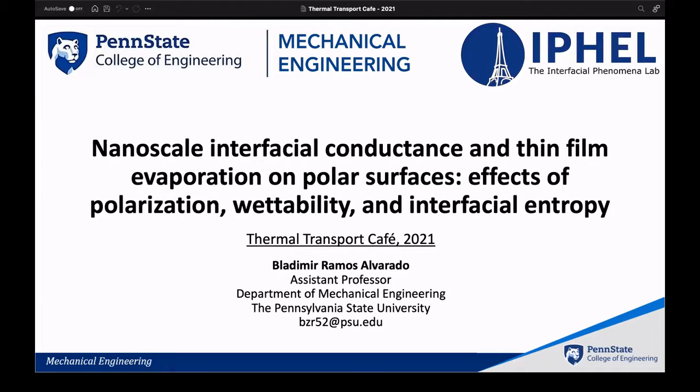So today, to fulfill the objectives of this Thermal Transport Café, I'm going to show you some of my findings, but also some of the challenges, the issues, aspects where I need feedback, aspects where I want to create discussion on nanoscale interfacial conductance and thin film evaporation. I'm going to discuss specifically the issues with interfacial modeling, polarization, wettability, and interfacial entropy.

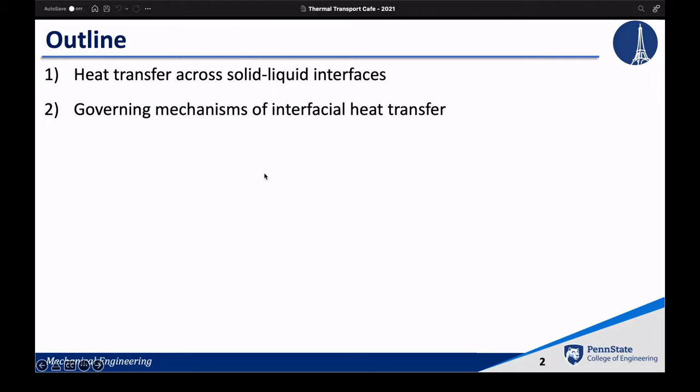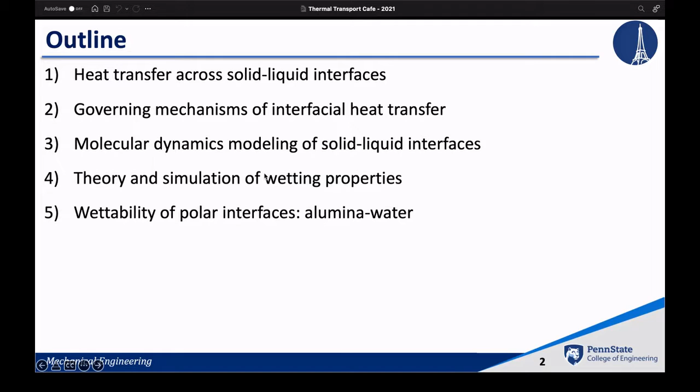A brief outline of my presentation: first, we're going to talk about my motivation to study heat transfer across solid liquid interfaces, the governing mechanisms of interfacial heat transfer as we understand them, molecular dynamics modeling of solid liquid interfaces, where I want to put emphasis on the challenges and opportunities to do research, theory and simulation of wetting properties as a metric to model interfacial affinity. Then I'm going to talk about a case study, alumina-water interfaces, interfacial thermal transport and wettability, interfacial heat transfer, and alumina-water interfaces. Lastly, some questions for open discussion.

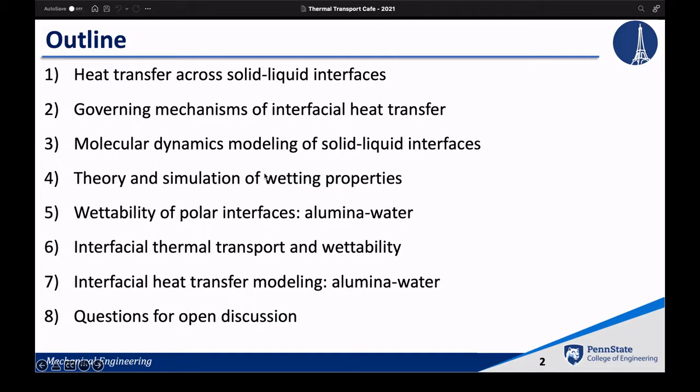As you can see, there are no conclusions, but I would like to open this communication in two ways. My main motivation to study heat transfer across solid liquid interfaces is photothermal therapy with noble metal nanoparticles.

Let me activate my laser pointer. Photothermal ablation and drug delivery systems are both enabled by near infrared light radiation on plasmonic particles, which create a change in the temperature of the particle. Those temperature-induced changes create breakage of the chemical links that carry the drugs, or thermal ablation. Those two objectives are enabled through solid liquid heat transfer.

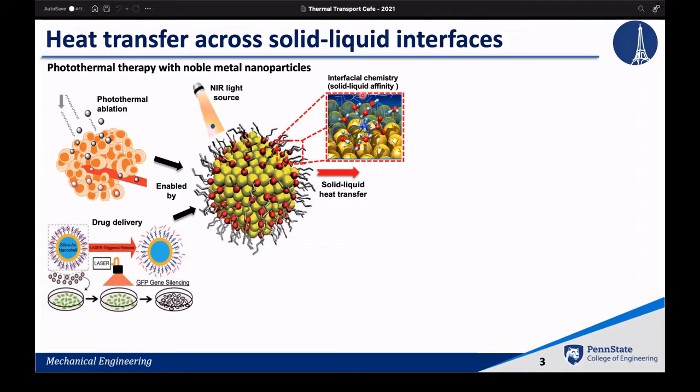The main modulation of temperature here is the amount of heat that goes from the solid into the liquid, driven by the main mechanism that I am targeting: interfacial chemistry, the complex interplay between temperature, linkage, the breakage of the links, heat transfer, and chemistry. Those are the three elements that we want to account for.

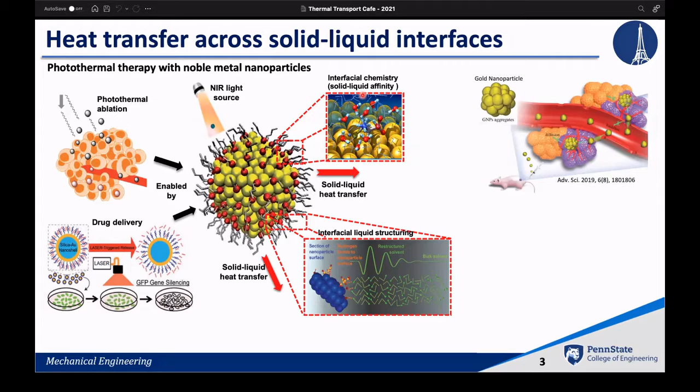As my theoretical findings have shown, interfacial liquid structuring is super important for solid liquid heat transfer. Again, this is for applications in the treatment of cancer, but it can also be applied to imaging.

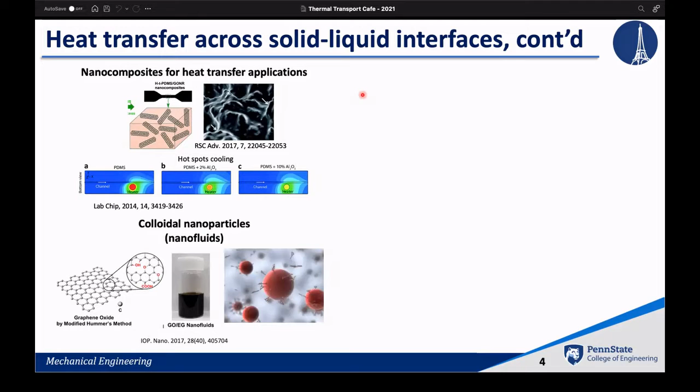Another application I'm interested in with regards to solid liquid interfaces is nanocomposites for heat transfer applications, colloidal nanoparticles as in nanofluids, and particularly for this presentation, filtration and desalination in porous alumina membranes, where the alumina-water interface is fundamental. Lastly, desalination applications and filtration using nanoscale systems.

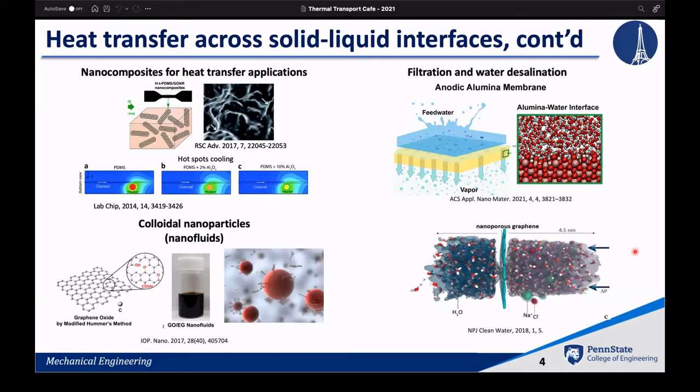To begin this discussion, I would like to briefly go over the governing mechanisms of interfacial heat transfer as we understand them.

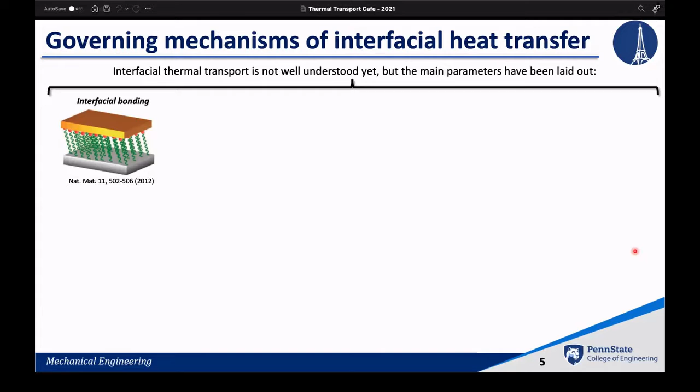Over many years we have studied this, we have a good knowledge of the main parameters that govern interfacial heat transfer: interfacial bonding, the strength of the bond between atoms across the interface, which determines the effectiveness of heat transfer, but also the modal mismatch seen on both sides of the interface. The better the match between modes, the better the energy transfer.

Roughness, even at the nanoscale, even in my simulations at the atomic scale, plays a big role in the amount of energy being transferred across interfaces, and particularly for solid liquid interfaces, liquid structuring at the interface.

What does that mean? The bias that the solid imposes on the liquid at the interface. You don't have that issue with solid-solid interfaces because solid atoms are not that mobile. But when it comes to solid-liquid interfaces, with the molecules of the liquid being the energy carriers, that becomes a big issue for heat transfer, one of the governing parameters here.

Some recent findings have shown that the interplay between these four is quite complex. For example, let me show you this example where we can see the interfacial conductance of a solid-liquid interface increasing as a function of the contact angle.

So the contact angle is increasing, meaning the solid becomes more hydrophobic. In theory, that says the solid-liquid interface doesn't have a strong affinity, but the thermal boundary conductance increases regardless. Here we see a graph, a set of data points showing that the contact angle actually increases for different systems, from bare gold to other chemically modified interfaces.

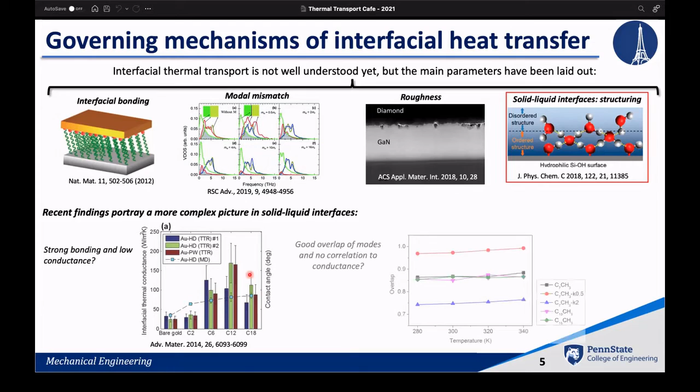So you're saying this is a good example. I'm saying this is a good example of modal overlap influencing heat transfer. But then, if we look at this other work, there was a nearly perfect overlap as a function of temperature for a similar kind of system, and there was no correlation whatsoever observed in the conductance.

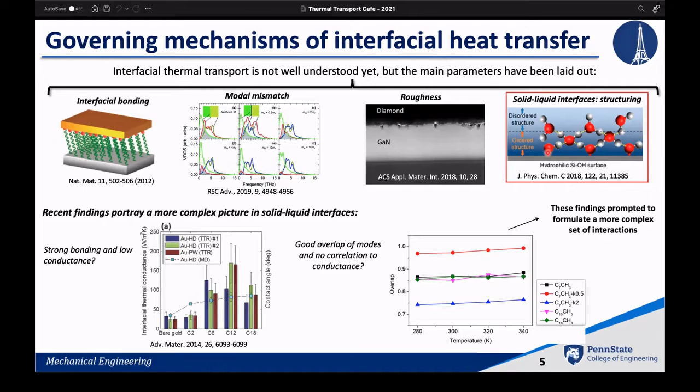What these authors eventually observed is that a complex set of interactions were needed to explain what was going on, and the parameter they used was the structuring at the solid-liquid interface. So in order to investigate this in a physically sound way, we need a modeling approach that can capture the physics, the chemistry, and the structuring of the interface.

But first, let me discuss some of the problems, limitations, and opportunities for doing this with molecular dynamics simulations. This is how we usually model solid-liquid interfaces: a very simple Lennard-Jones potential with two parameters, epsilon and sigma. These need to be determined, while R is the distance between atoms at the interface. This only accounts for van der Waals forces, and sometimes we include electrostatic forces.

How do we do that? By calibrating epsilon and sigma so that both are included in our model. But how do we actually do that? First option: this is a widespread empirical process called either Lorentz-Berthelot or mixing rules, in which the sigma parameter is determined by the arithmetic mean of these two parameters, and the epsilon parameter, the energy parameter of the interaction, is calculated by the geometric mean.

There's no physically sound basis for doing this, and the inappropriateness of this method has been demonstrated in a paper, I think from the 80s, showing clearly that this method is valid for monatomic non-reactive gases—and what we have in these solid-liquid interfaces is not even close to a monatomic non-reactive gas system.

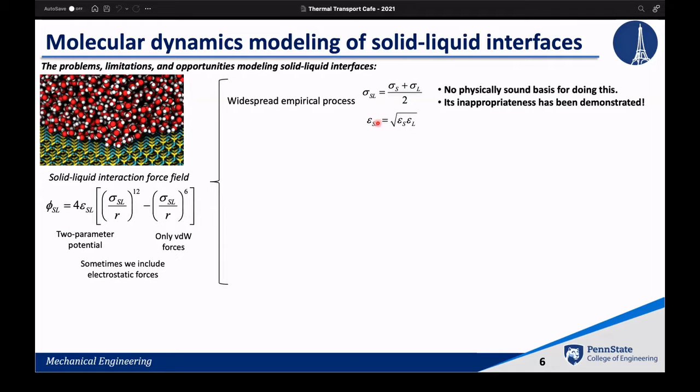You can go over the literature and find this method applied in many different papers. Sometimes we're eager to show that our model has some level of prediction of experiments, and we neglect the importance of properly modeling the interface.

Second method used in the literature: microscale matching of macroscopic wetting behavior. Here we go to the literature or conduct experiments, measure the contact angle on a surface, and try to match that in a size-independent molecular dynamics simulation. In theory, that's impossible to do, since molecular dynamics simulations are size-dependent. What we do instead is an extrapolation to the thermodynamic limit, where we can retrieve that macroscopic calculation.

This process is more physically sound than the first one. However, the issue is that we need to calibrate one parameter while keeping the other constant. And still, sometimes they rely on a calculation that gives the equilibrium distance between the solid atoms and the liquid molecules—and oftentimes that calculation is not very physically sound.

When you try to compare that to AFM calculations or DFT electronic structure method calculations, you see that the equilibrium distance between the solid and the liquid is not really what is predicted from this equation. Again, it's not physically sound.

And even if that's possible, we would have an infinite number of possibilities for obtaining that desired contact angle. If we have two parameters and we keep one constant, we need to close the problem with another variable. And lastly, we have curve fitting of DFT-derived adsorption energy curves.

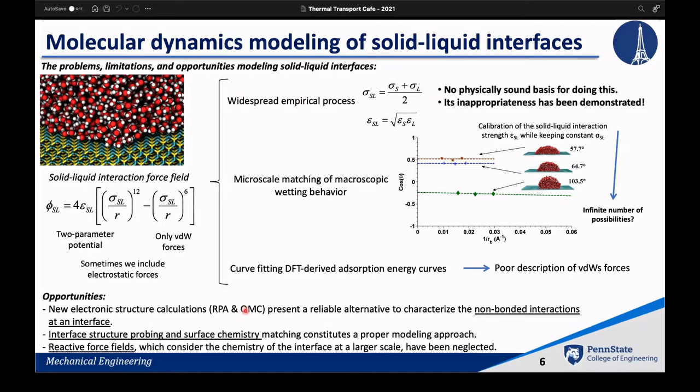And lastly, reactive force fields such as ReaxFF and some others have been neglected for studying heat transfer. So that's why I wanted to focus some time on this slide, so we can go back to the discussion on how to improve our modeling.

These slides are going to talk about some of the calculations that I do in my group to model heat transfer and interfacial affinity. First, we calculate interfacial affinity.

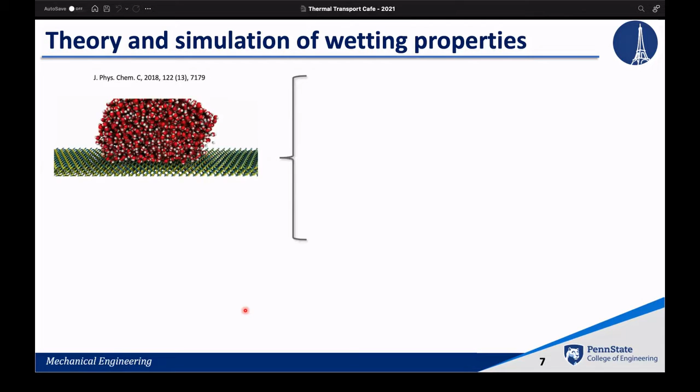We characterize interfacial affinity through wettability simulations at the nanoscale, which, as I explained, can be expanded to the thermodynamic limit by performing extrapolation. We essentially allow a group of water molecules to equilibrate on a solid, given a set of interactions that I'll later discuss how we extensively work to characterize. The result could be either hydrophobic or hydrophilic conditions, and these depend on the quality of the interface model.

We calculate the work of adhesion for every interface as the change of the free energy of the system, given by the energy change in the interaction energy between solid and liquid molecules, and the entropy change. This is not the thermodynamic property, but a characterization of the change in the state of order from the bulk, where it's highly disordered, to the interface where we have the bias imposed by the solid.

And that's also equal, as we know from thermodynamics, to the surface tension times one plus the cosine of the contact angle. We have created a model, so this calculation is kind of easy for part of them. The contact angle can be obtained from my simulations, and the surface tension can also be obtained from the simulations. This energy calculation is a very straightforward summation of all the energy interacting in the system.

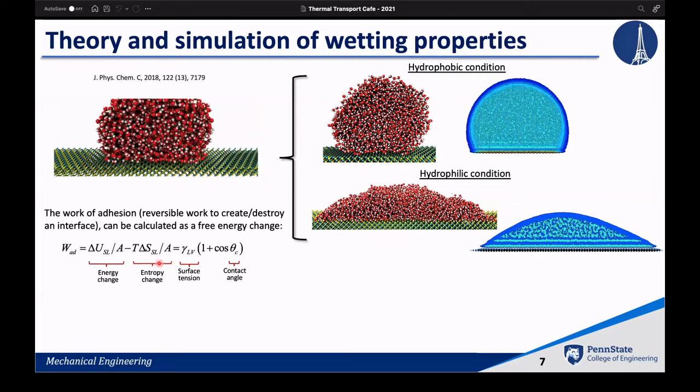But this one is tricky—very tricky—and no theoretical model has been fully successful at predicting it. We have come up with a kind of engineering approach to answering this question, in which we calculate the work of adhesion as a total energy of interaction calculation, using the energy of interaction between one single molecule and an infinitely large surface of solid atoms.

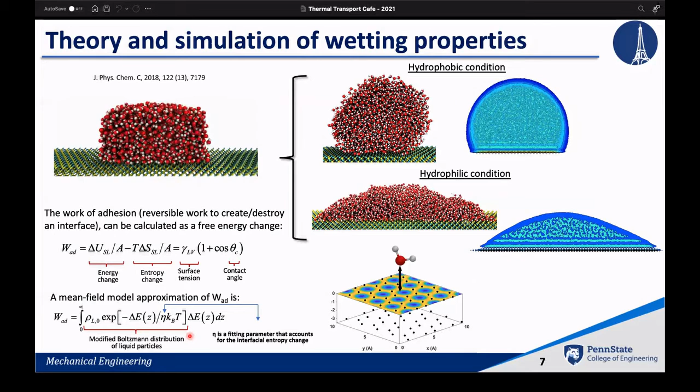And then we calculate that energy as given here: energy per unit atom. Then we integrate that energy per atom or per molecule over the distribution of liquid particles, which we model as a Boltzmann distribution. In the Boltzmann distribution, we include a tiny fitting parameter that eventually helps us account for interfacial entropy change. That fitting parameter, even though it seems like a fudge factor we're including there, the physics built into this model is strong enough that having one data point is enough to calibrate the full spectrum of wettability in our models.

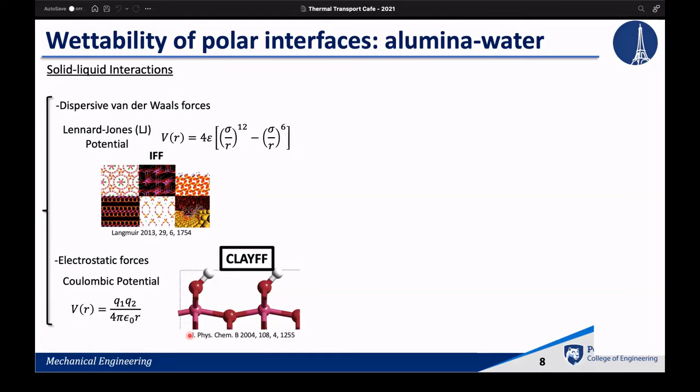Let me show you a case study of the application of these methods for alumina-water, in which we model the liquid-solid interfaces through van der Waals forces and also electrostatic forces in a separate manner. They were not put together into a single potential, but split into two. We started with the clay force field developed for ceramics interacting with water, but we encountered some interesting issues.

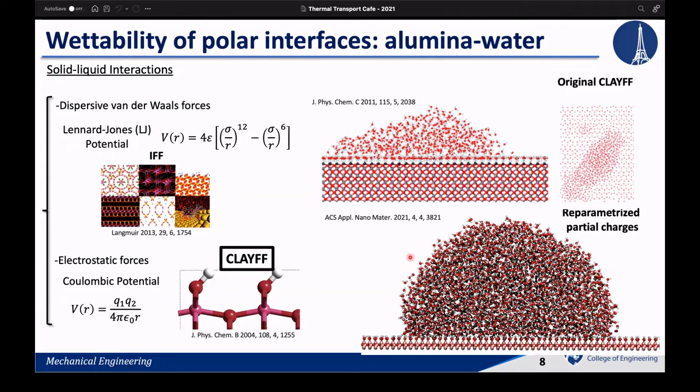In this 2011 paper, they tried to model wettability with this force field. However, look at the shape of this droplet—even if it's tiny, there is no physically sound shape here, and looking from above it looks kind of weird. We had to reparameterize the partial charges in the system because we observed they were off the charts, completely out of the physical range, and now we obtained a physically sound droplet shape.

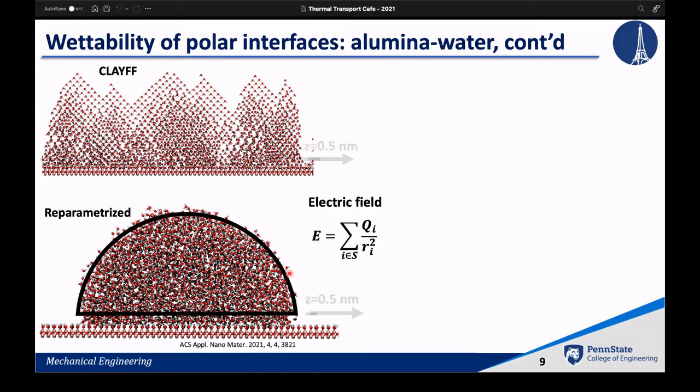Check this other illustration from our implementation of the clay force field as presented originally. The water molecules align with the surface, indicating a rather enhanced electrostatic force compared to our reparameterization. When we probed the electric field at this distance from the interface, we observed an over-exaggeration—the electric field at the interface was way over the charts. That's why the molecules were arranged in this shape; they were polarized, effectively polarized.

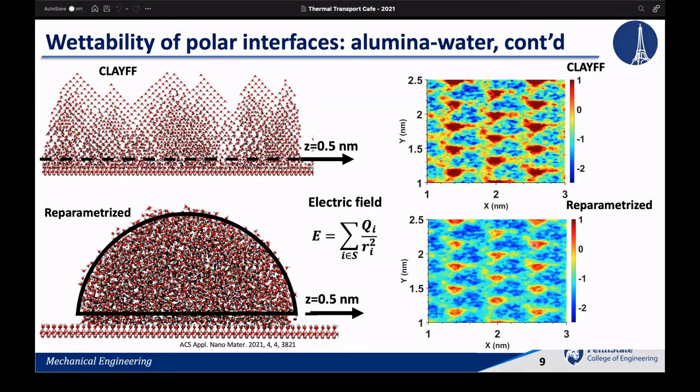We reparameterized the electrostatic force field using reactive force field simulations. In these simulations, not only are the van der Waals interactions recalculated at every time step, but also the electrostatic forces are recalculated and equilibrated.

So that's the aspect of interface interactions, but what about the chemistry? Usually when you model a solid-liquid interface in molecular dynamics simulations, you cleave a solid surface, creating interface atoms that are chemically active. Their oxidation state and valence state are not completed, so we need to passivate them, and we passivate this interface based on what we observed in the literature—with hydroxyls.

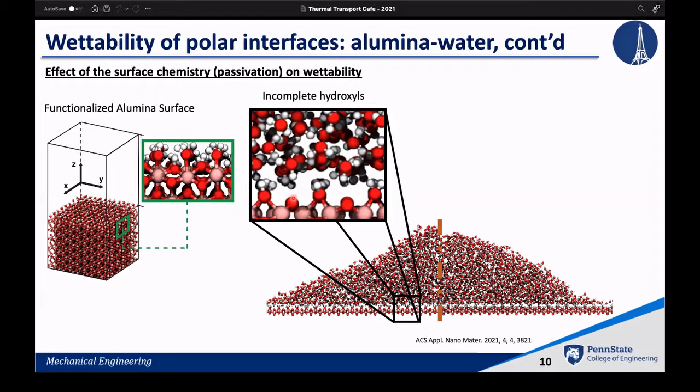We present two different cases: one where hydroxylation was not complete, and one where it was complete. The first case has some oxygen atoms that are not fully passivated, and even though we made efforts to create a more realistic interface, the geometry of the droplet is not that physically sound. When we fully passivated the interface, we follow the profile we were expecting to observe.

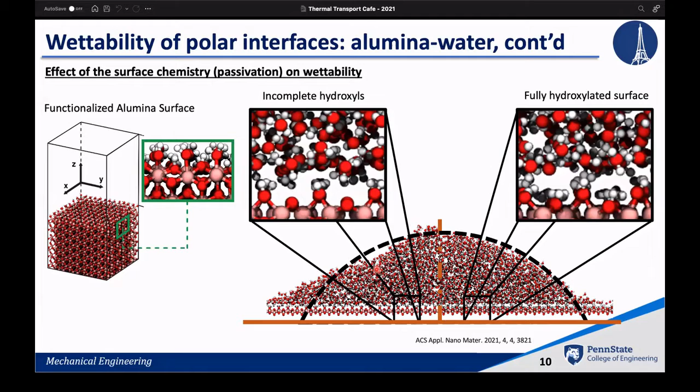This highlights the importance of how you model the solid-liquid interactions—van der Waals forces, electrostatic forces—but also the chemistry of the interface, how you properly passivate an interface exposed to a liquid. We did a lot of work just to get the interface model right. After this, now that we know our interface model is physically sound, we can study wettability.

We consider three different surfaces: the 0001 plane of alumina, the 1210 plane of alumina, and amorphous alumina. We don't know which plane will be in contact with water, so it's good to have this characterization for different planes. We observe an anisotropy of wettability, which has been reported before and is predicted and explained by our wettability model, and more recently by experiments.

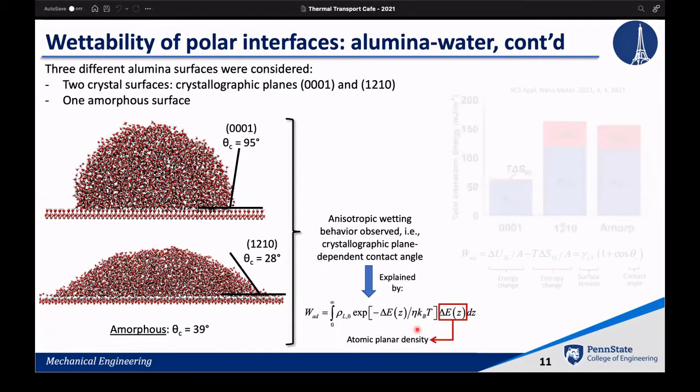Where is the effect of the atomic planar density? Right here in this energy per unit molecule. Now that we have this fully characterized interface and the wettability conditions characterized, we were able to solve for the entropy change of the interface as indicated in this equation. How? Well, we have the contact angle, we know the surface tension of the water model we are using—this calculation is quite straightforward—and then we can solve for the entropy change.

This is how we did it right here. As you can see, an interesting observation is that the hydrophobic surface had less interfacial entropy, and the hydrophilic one had a higher level of interfacial entropy.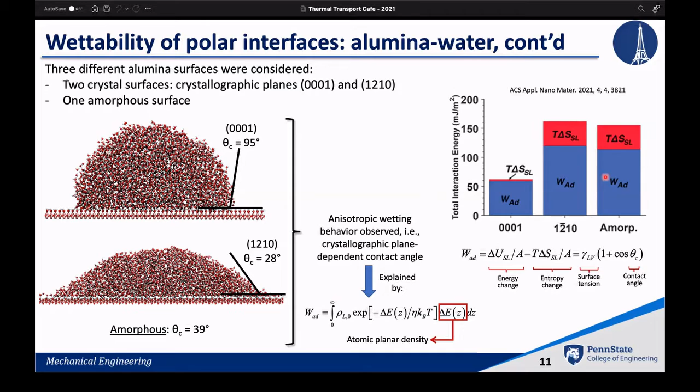All right, with that we finished our characterization of interfacial affinity and interfacial modeling, and we were able to move on to interfacial heat transfer.

Some traditional measurements of TDTR, of the thermal boundary conductance, have shown, in this older work from 2009 by Shenogina who published these experimental results, that there's some sort of relationship between the conductance across the interface and a parameter that is proportional to the work of adhesion.

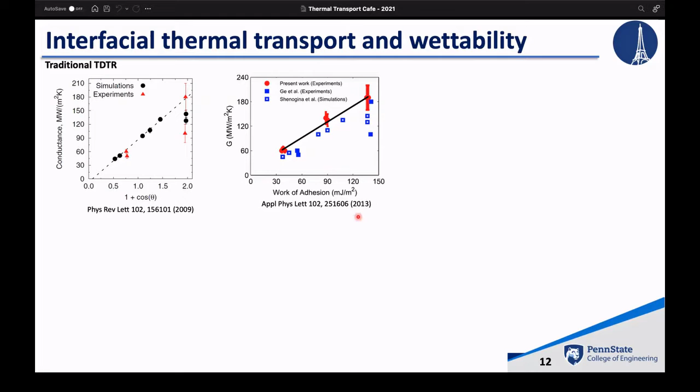More recent experiments have shown, for example with plasmonic nanomaterials, that that relationship is not that simple. In 2016, and more recently in 2019, Patrick Hopkins showed no relationship whatsoever with the transmission of energy across solid-liquid interfaces as a function of the work of adhesion. These data points are all over the place. No linear relationship was observed, and this also matches my modeling efforts, which I'm going to show you now.

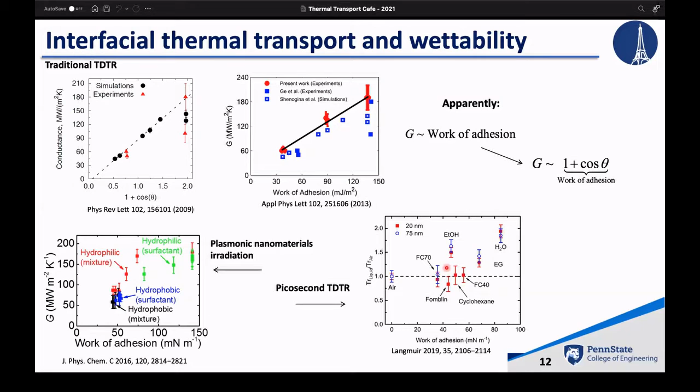This is how we model heat transfer across solid-liquid interfaces, a very traditional non-equilibrium model that resembles an experiment in which we create a temperature gradient across a system by injecting a given amount of heat on one end of the system, rejecting the same amount at the other extreme, waiting for steady state, and then calculating the temperature discontinuity at the interface so we can calculate the thermal boundary conductance given in this expression.

In addition to this simple calculation, we also perform a more granular calculation by going directly at the interactions between the solid and liquid atoms at the interface. This calculation also allows us to calculate the spectral makeup of heat transfer, the heat transfer distribution as a function of frequency of the modes going across the interface. From this granular, atomic-scale calculation we can also calculate the thermal boundary conductance as indicated here.

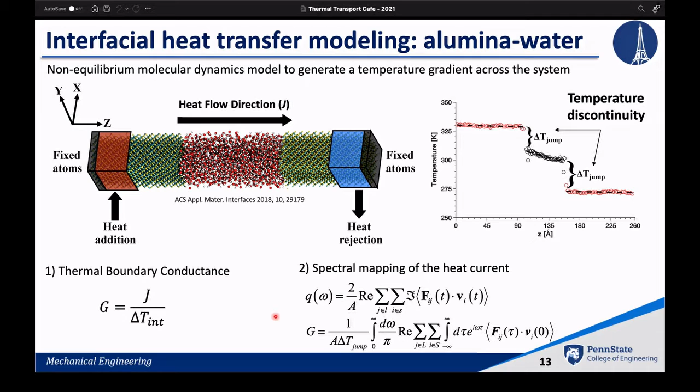The results that I'm going to show you next are a combination of both. Let's go see them.

Let's take a look at another metric, the total interaction energy. Maybe you're thinking the contact angle is not that physically sound because it's also a function of the granularity of the interface, or the work of adhesion suffers the same issues. Just look at the pure interaction energy, which is what we have here. Same trends. We would expect to see this point over here. That's not what we observed.

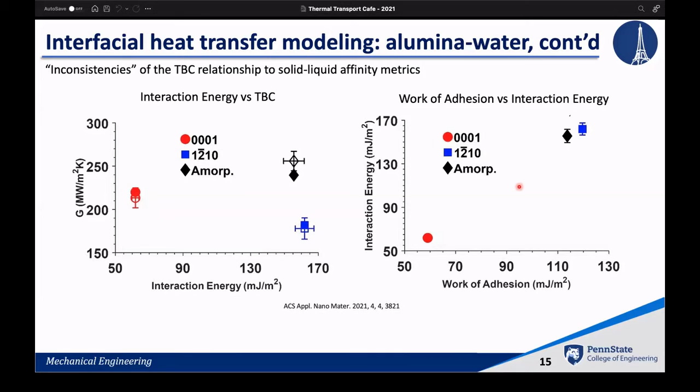We observed this before for silicon carbide interfaces, where if you plot transmission of energy, the thermal boundary conductance versus the contact angle, it doesn't really follow a universal trend or universal line, even if you change the metric from contact angle to work of adhesion. And it changes as you change the plane in contact with the liquid.

My dissertation work also showed the same, but I added an extra level of complexity and robustness by including two data points that account for the same wettability for a more complex system: a system coated with graphene that was theoretically, experimentally, and computationally demonstrated to have the same wettability. As you can see, it's a complete breakdown of those predictions.

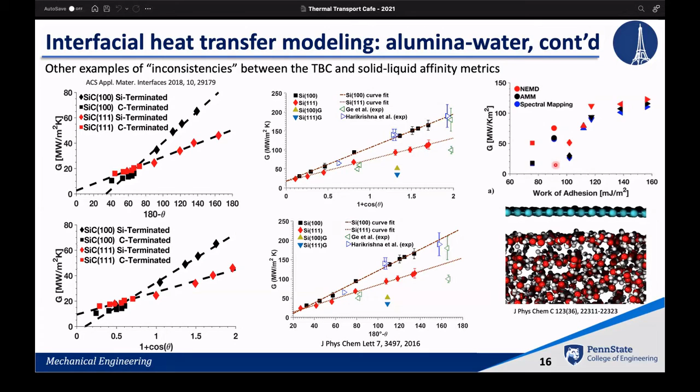More recently, we investigated different approaches to model a graphite-water interface, using many different interaction potentials derived from empirical methods, wettability, DFT, and advanced novel electronic structure calculations. Again, we see no relationship whatsoever in our calculations. But later on, I'm going to show you how we were able to reconcile this.

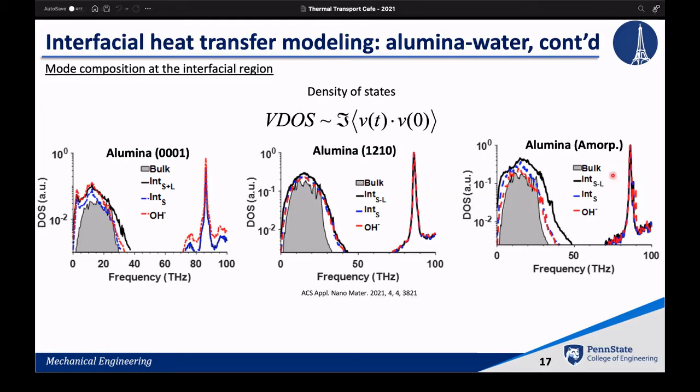It was interesting to observe the creation of this, but only at the interface, for all the surfaces. As I'm going to show you next, they really do not contribute a lot to heat transfer.

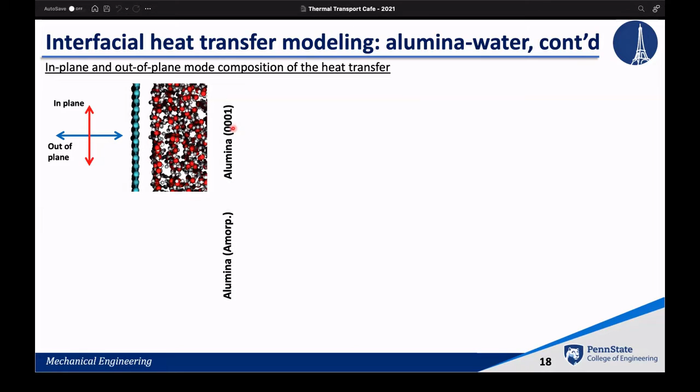Now we characterize the composition of interfacial heat transfer in out-of-plane and in-plane calculations. I'm going to show you two interesting cases: crystalline alumina and amorphous alumina.

The Coulombic interactions have this makeup. As you can see, most of the energy transfer in the crystalline system is out of plane—kind of a 70-30 relationship of the transmission. This little bump you see right here is the contribution from the optical modes created at the interface, and as we predicted, they don't really contribute much, but it was interesting to see that.

Same thing, you can see the little bump for the amorphous system, but this is quite interesting: if you look at the lines, now the in-plane modes are contributing the most to energy transfer—I'd say maybe a 60-40 relationship. It was completely inverted. For van der Waals forces, we observe the same behavior.

In the crystalline surface, out-of-plane contributions make up most of the energy transfer, and that relationship was inverted for the amorphous case, where in-plane modes contributed the most to interfacial heat transfer. How can we explain that?

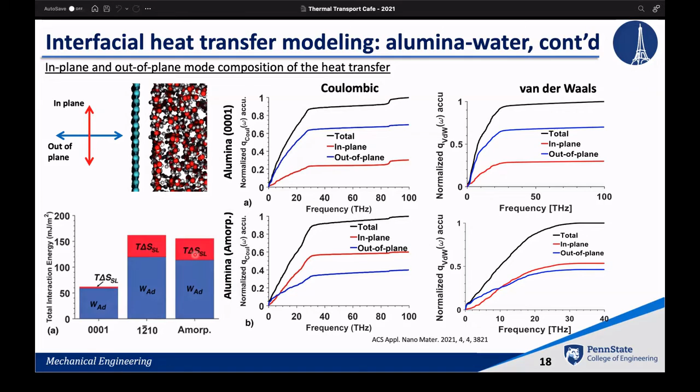From the interfacial entropy: the interfacial entropy change for the crystalline surface is super small, while for the amorphous system it's quite large. What does that mean in terms of the transmission of energy across the interface?

If you take a look at the distribution of liquid molecules at the interface for that crystalline hydrophobic plane, the change from bulk to interface, as indicated in this peak, is quite minimal. So the interfacial entropy change is not that significant.

For the amorphous interface, as you can see, it is kind of broken from the bulk. There's a lot of variation at the interface, a very large peak, and then secondary peaks close to the interface, because of the closeness of particles near the interface. So we have more availability of energy carriers—they get closer and interact in a stronger manner.

As you can see in the green particles in this video, they remain closer to the interface and are allowed to transfer energy in that direction, the in-plane direction. While the more hydrophobic, less granular interface mostly transfers energy in the out-of-plane direction. By the way, the coloring of this animation goes from red to blue, where blue represents more heat transfer and red represents less heat transfer.

As we were expecting, most of the energy transfer happens between 2 and 4 angstroms from the interface, and that's where we see the most drastic change in the distribution of water particles at the interface. Again, in these systems, the water molecules are the energy carriers.

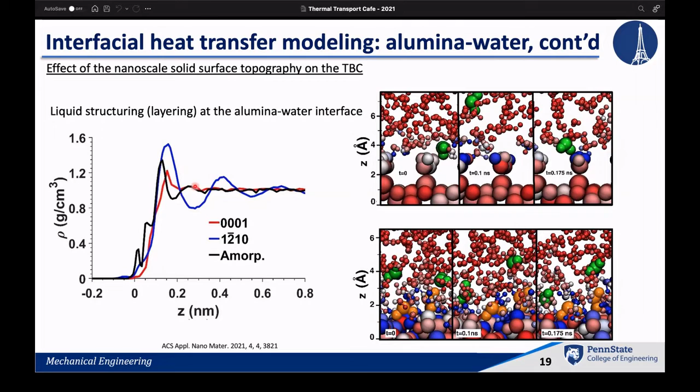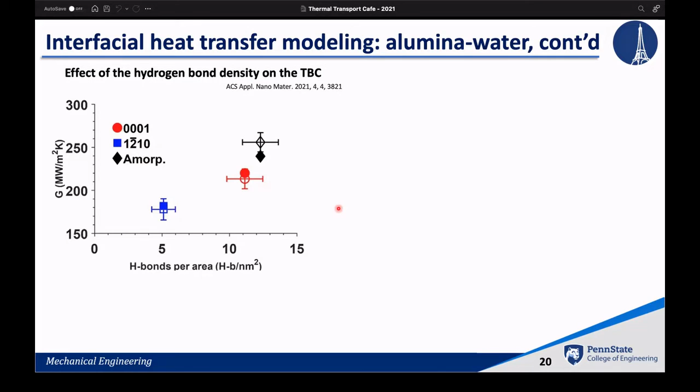Lastly, I'm going to finish this discussion on interfacial transfer using the metrics that were able to explain what was happening. For this highly polar interface, the creation of hydrogen bonds was the most significant mechanism for energy transfer, in which we finally were able to explain what was happening here. As we increase the concentration of hydrogen bonds per area, we also increase the transmission of energy. And as I have been pushing for this idea since 2016, the availability of the energy carriers across the interface helps to describe energy transfer.

In this case, these are not really phonons. The particles transfer the energy, and using this liquid density depletion calculation, we account for, one, the closeness of the liquid particles to the solid interface, and two, the concentration of the liquid particles at the solid interface. When we average this calculation over time, as it's performed to obtain the energy density, we get those calculations of concentration over time. And as indicated here, the previous calculations that made no sense make complete sense just by looking at the distribution of the energy levels.

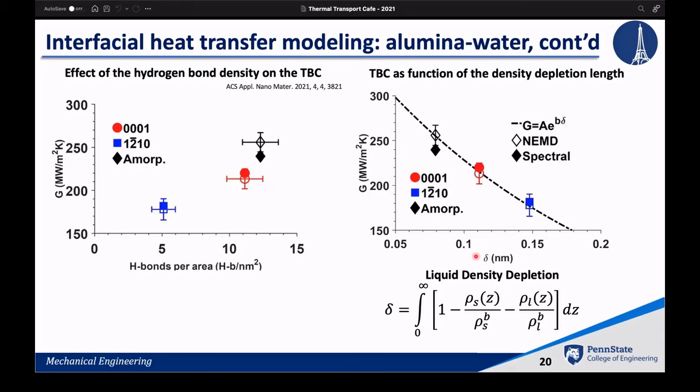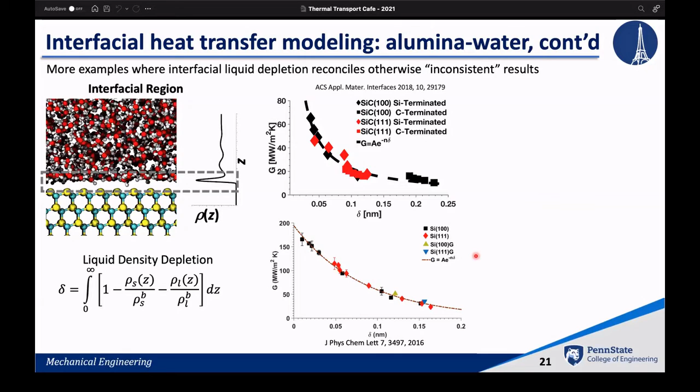Now, this calculation is not unique. As I said, I've been pushing for this idea since 2016. We observed that for silicon carbide, those previous calculations that I showed you that were crossing each other and were not making a lot of sense, using the density depletion, they are completely reconciled. We observed the same for silicon surface coated with graphene, and we observed the same behavior for graphene graphite surfaces modeled using a wide range of modeling approaches.

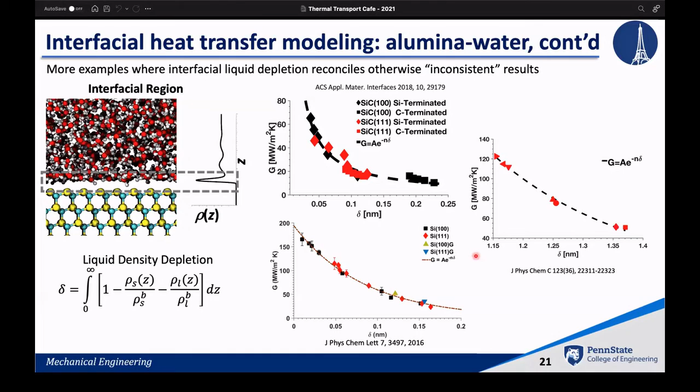All right, now briefly, let me just finish this presentation. Now that we performed this, to summarize again: a robust model of the interface, plenty of efforts were dedicated to have a physically sound model of the interface. Then we characterized the affinity between the liquid and the solid, heat transfer, and we finally applied this modeling, this preliminary data, to model boiling in a more realistic system, as indicated here. The model that we are using here is, again, chemically sound, physically sound.

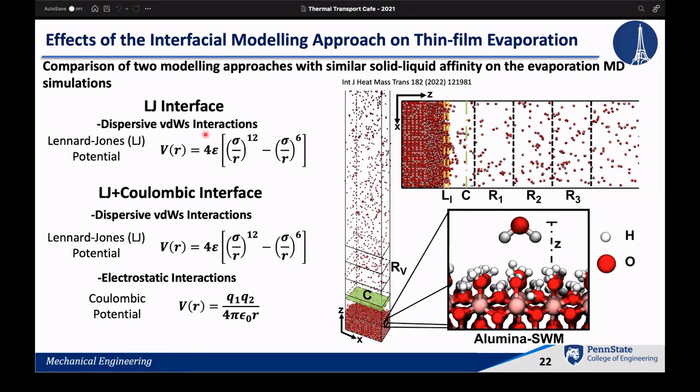We account for van der Waals forces, Coulombic forces, and what we did here is to account for the effect of electrostatic forces in these two models: the Lennard-Jones interface and the Lennard-Jones and Coulombic interface. The Lennard-Jones and Coulombic interface accounts for both interactions and has a given wettability, and we modified this interaction potential to have the same wettability, but with only van der Waals interactions. The calculations and the results were drastically different. As indicated here, the model that only accounts for Lennard-Jones interactions presents a liquid film that decays faster, that gets smaller faster, than the Lennard-Jones plus Coulombic interface.

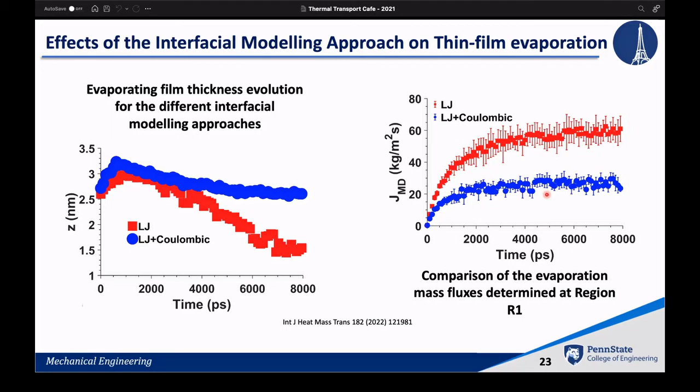And also we observe higher rates of evaporation as expected. You see, the fluid film is getting smaller, so it means we have more evaporation as compared to a more physically sound Lennard-Jones plus polarization plus electrostatic interactions model. The reason for that, it was kind of pretty obvious, but it's significant that it gets ignored in the literature, is that the range of effect of the Coulombic contributions, the electrostatic contributions, goes way beyond the cutoff for the van der Waals forces, and not only affects the wettability that you see, the energy transfer that you see, but it's also going to affect the rate of evaporation that you see in your models, and you need to be very careful with that.